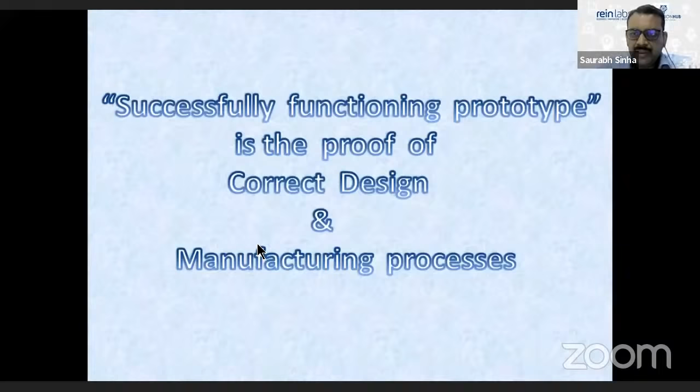It is stuck here also. The suggestion is to escape this and come to the mode showing smaller slides on the left and the major slide in the center, then keep moving through, since slides sometimes get stuck.

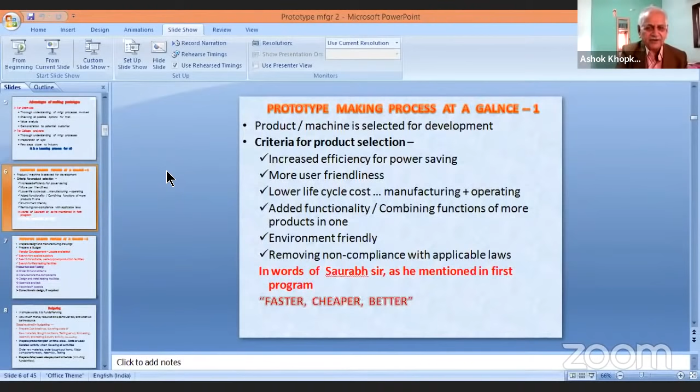So this is the criteria. If you have selected the product based on this, there are certain steps you are going to take. First, prepare a design and manufacturing drawing. Then prepare a budget — what is a budget, I am going to explain it separately.

Prepare a budget, then vendor development. I spoke to you about vendors also — vendors are required for material and manufacturing activities, so you have to search for a capable supplier. Then search for a suitable, well-equipped production facility, and search for a field testing facility. We will discuss this more in detail if time permits, at the end.

Then production and testing — actual production. What are the steps involved in actual production? You have to order raw material for all components, and there's something known as bought-out or ready equipment. We'll discuss this and see the photos — everything is included in this presentation, so you can be more comfortable after seeing those things.

Then manufacture the component — that is the actual manufacturing activity. Then you have to test it. For testing, you may require some setup, which we call a testing facility, test rig, or testing equipment. We have to design that and make it ready. It depends on what type of product you have.

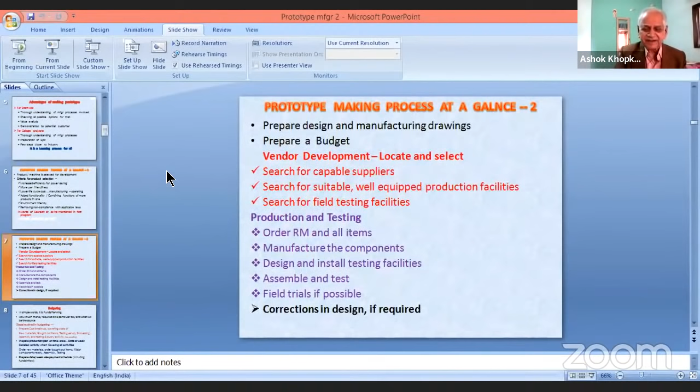After making the changes in design, you have to make one more prototype. So if the first prototype is say 80% correct as per your requirement, the second prototype will be almost 99% correct. This is the entire prototype making process.

We are now going to see what is budgeting. In simple words, budgeting is funds planning. We do it daily - how much money we need for a certain occasion and from where I am going to bring that. Right from using your own pocket money in college, you are doing fund planning and budgeting. I want to give this gift to somebody, so I have to save some money this month, so next month I have to give this gift to my friend. That is what I call budgeting in very simple terms. So how much money is required on a certain day, we try to keep it ready.

What are the steps involved in making a budget? First, you have to prepare a cost breakup covering cost of all raw materials, bought out items, and testing setup if you have to make, because that is also going to cost you something. Then processing, that is machining - you have to pay something to the person doing the machining for you. Assembly and testing and all other activities - you have to travel for this. It may be just 100 rupees at each visit, and there may be 50 visits involved totally during the project, so you will be spending so much money. All that should become a part of the cost, because you have to recover everything.

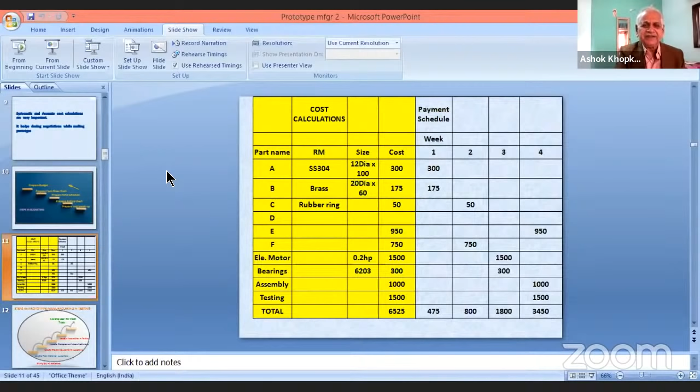Going like this, by end of the 4th week, so much amount is required. So all this is what I call the budget. It clearly gives you how much money you need on which particular day or week. You can easily make it - it's a very simple logical step. Apply your little engineering knowledge, little general knowledge, and you will get it.

This is a graphic view of the steps involved in manufacturing and testing. The first step is naturally to study the bill of material, which shows what raw materials and ready equipment are required. Then you proceed further: locate raw material supplier, ready material supplier, component manufacturer, assembler and tester, and field testing.

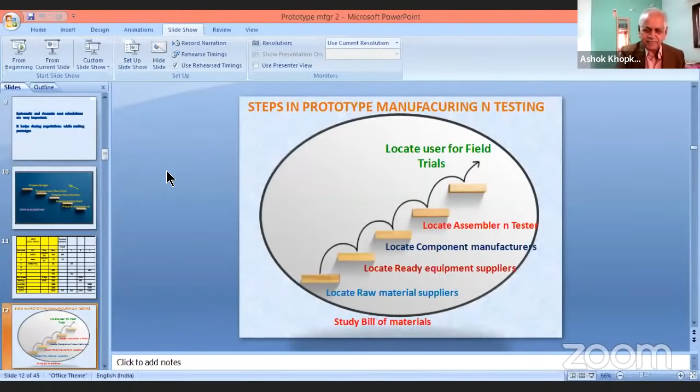Locate suitable raw material supplier. Before that, you must remember you will deal with many types of materials. What are the different types? Metals - so many metals: steel, stainless steel, brass, copper, aluminium, titanium. I have not included many things, this is just a small list. Then non-metal parts: rubber parts, plastic, ceramic, oils, paints, so many things.

Different shapes - what is the meaning of shape? I'm going to show you some photographs and I'm sure you will understand clearly. So you have round bars, hexagon bars, square bars, flat, plates, pipes, tubes, different structural sections like angles, channels, T, I-beam. Then there is another class of raw material which is castings, forgings, molded parts.

So you must know that your part will be one of these things and you have to order these materials from the proper supplier. Every supplier does not supply all the material - somebody supplying plate may not supply pipes and tubes, somebody supplying structural sections will not supply square bars, rods and other things. So for every material, you will have to look for a separate supplier. If somebody is supplying more than that, very good.

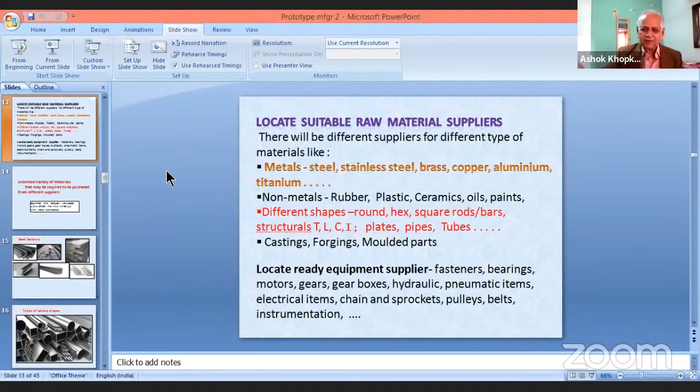Then you have to ready equipment suppliers like bolts, nuts, bearings, motors, gearboxes, hydraulic and pneumatic items, variety of instrumentation, electrical items, drive items like pulleys, belts. This is again unlimited variety. You must have at least some basic knowledge of these things so that you are able to order the material with confidence.

If you have clear understanding of these, your supplier will give you the right material because you have ordered it correctly. Like say, if you want a 100 channel, there are 3 varieties: light, medium, heavy. Which one do you want?

So study the bill of material properly. If the designer has not mentioned it, you ask him. Otherwise the supplier will give you anything which may be wrong and you will be wasting time on that. So you have to be properly acquainted with the material. That is one basic skill required for developing a prototype.

These are all the things. I'll just try to see if I can start the slide show with this. Do you see that?

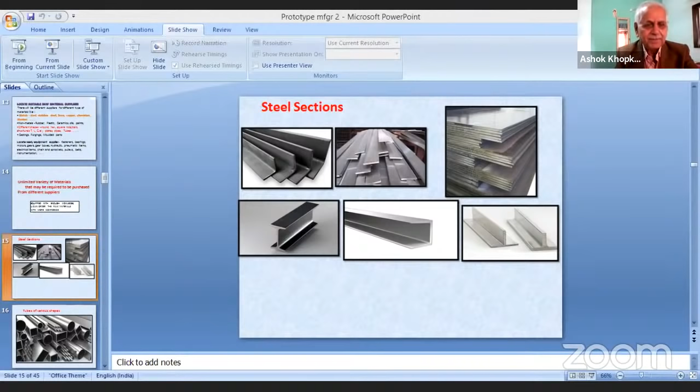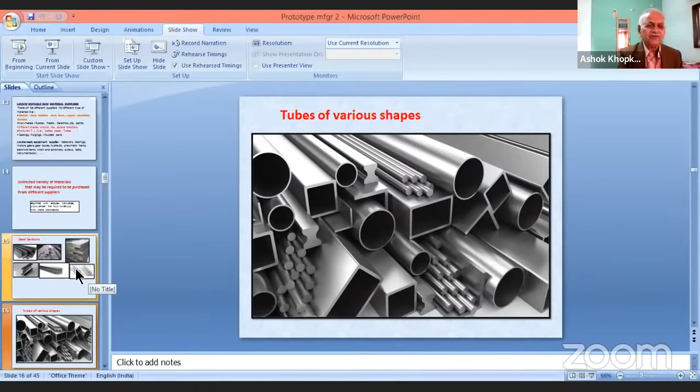This is again various sections, various tubes, pipes, flat, and everything.

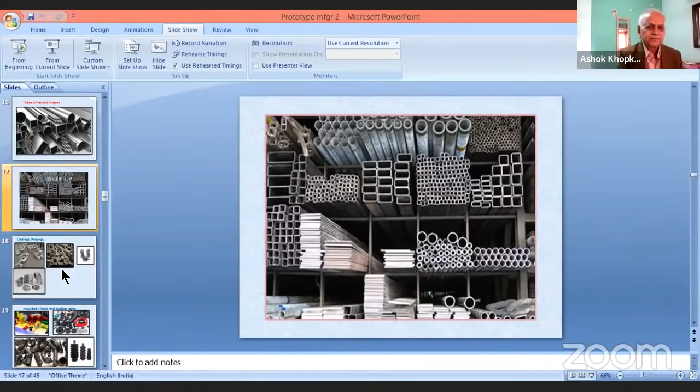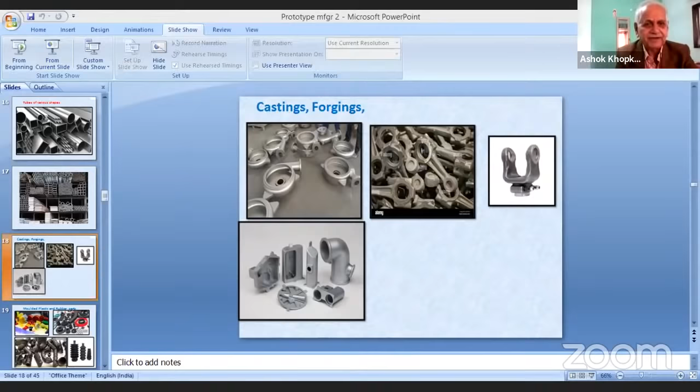Has the slide changed, Saurabh sir? Has the slide changed? Now it's on castings and forgings. Okay, so there is a problem. I am now we are 19. Now it's changed.

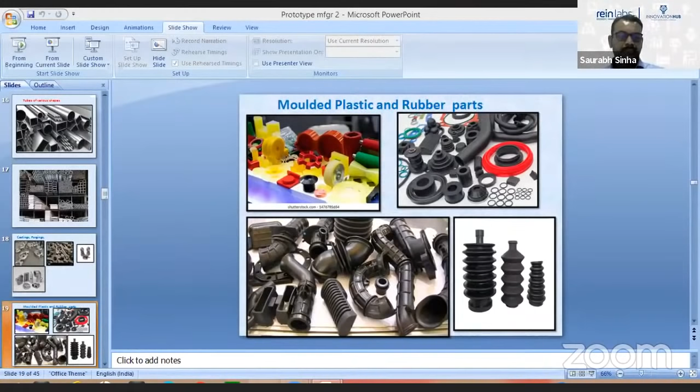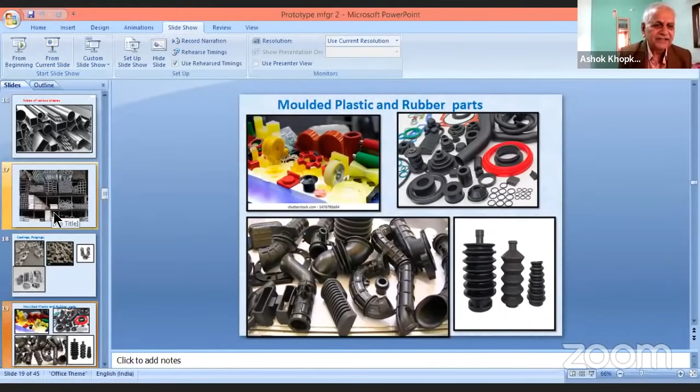You can see all colorful things because these are all the colors available in all these non-metals. So variety, bellows on the right side, so many connecting pipes, sealing rings and spacers, drives, so many things. You will be dealing with all these materials. That is what I am trying to show you, and you must get acquainted.

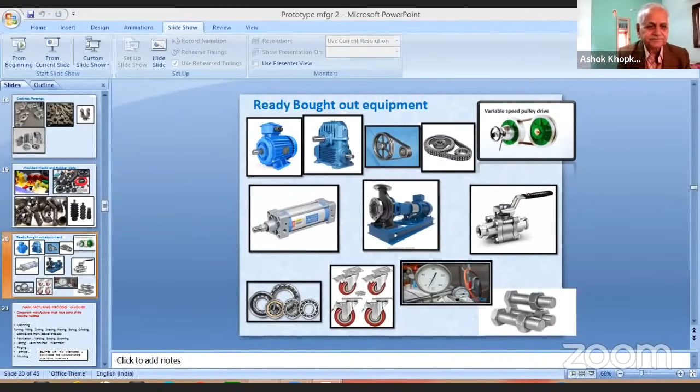These are the ready-made equipment: electric motors, gearboxes, chain pulleys, sprockets, variable speed drives, pumps, pneumatic items. This is only one small representative item from that field. If you go to pneumatic, there are at least 1,000 products which you will be able to select and need to use. So this is all about the materials.

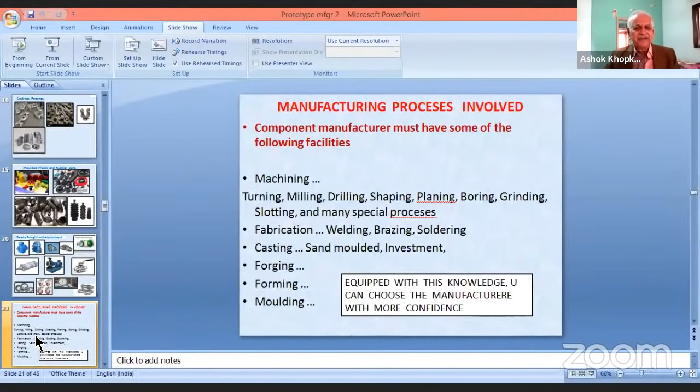Then you must get acquainted sufficiently with the manufacturing processes involved. What are the processes that are going on? First of all, it can be machining. Again in machining there can be turning, drilling, boring, you know all those things. Fabrication, welding, brazing, soldering. Fabrication means welding, joining two metal pieces, we call it material joining. The machining process is called material removal process.

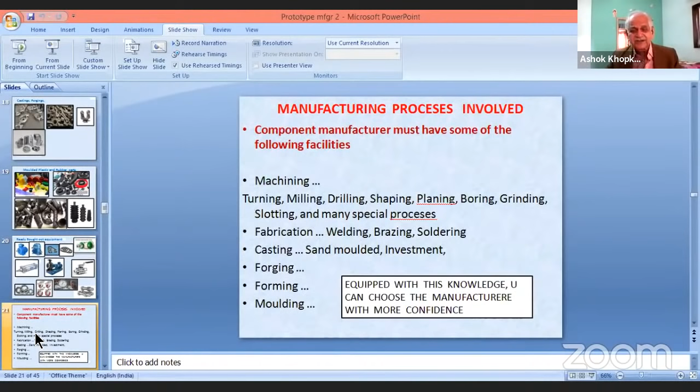Then comes casting, forging, forming, molding. They are actually some of the most common processes. I have not listed any uncommon process in that. Like in fabrication welding, there can be friction welding, there can be forge welding. So all these things may not come at the stage of prototype making, that is why I have not included them.

Now comes the most important question: how to locate suppliers and manufacturers. At the startup stage, you may not have much idea about the surrounding industrial conditions, what industries are around you and what they are doing. So where are you going to get the person who will do a certain milling job or planing job for you? Who will do that? You don't know.

You have to supply that. Raw materials, who will supply the raw material to me? So first find out and see what is the possible source for that. What is the source? Industry association members directory. What is an industry association?

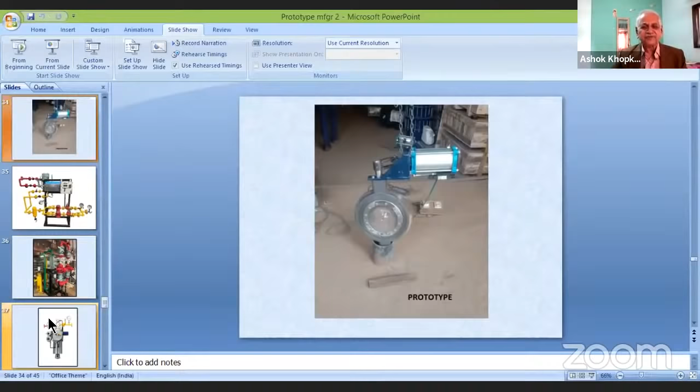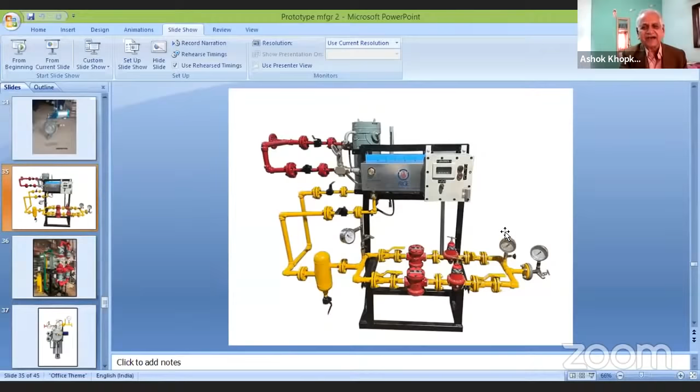This is another system. Let me see if I can show you. Okay, quite a complex system. This is one where I was one of the main people involved in design and development of the product.

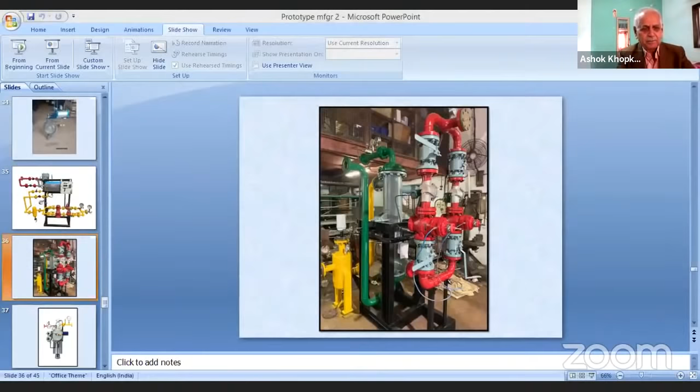Can you see the next slide now? Yes, okay. Oh, this is a warning for me to end. Okay, fine.

What is the importance of inspection report? For startups, it is used for future reference. When you make the next similar product, you must know what was the result I got last time, whether I am getting the same results now or not. Then it can suggest suitable improvements, what can be done to improve the performance.

And it's used for showing to the potential customer. See, this is how we have tested it. This is the test report. A customer always prefers a company that is systematically doing the testing and maintaining the record. So that's a plus point.

For college projects, I think you have to face the Viva. During that, this report will be useful. You can read it, study it again, so you know what has happened and how it was done. Then for a job interview, that is the place where the industry knows you have come close to the industry and worked there physically, so if they ask you questions about that, you should be able to answer.

And thorough understanding of the inspection process. This process and the manufacturing process are the two things which are very essential for the industry when offering a job to a person.